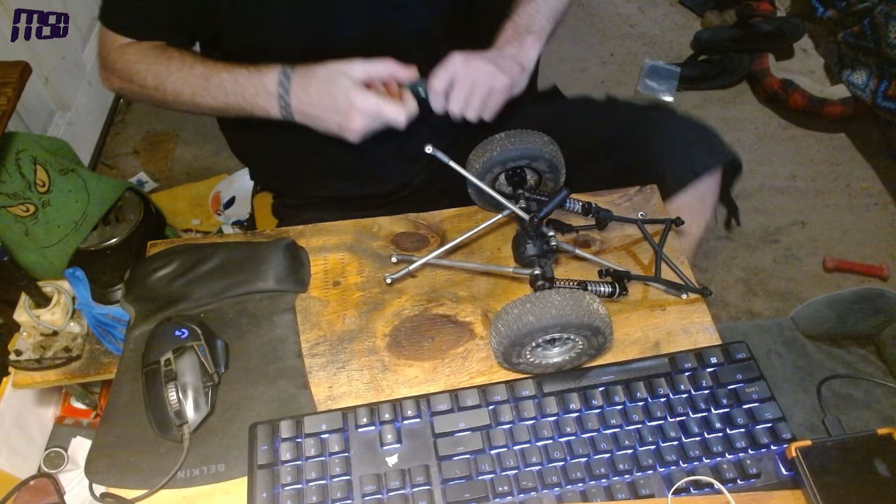Damn it, my grip doesn't want to work today. Oh man. The O-ring rolled in this thing, so I gotta use the pliers to get it out. Hate when that happens.

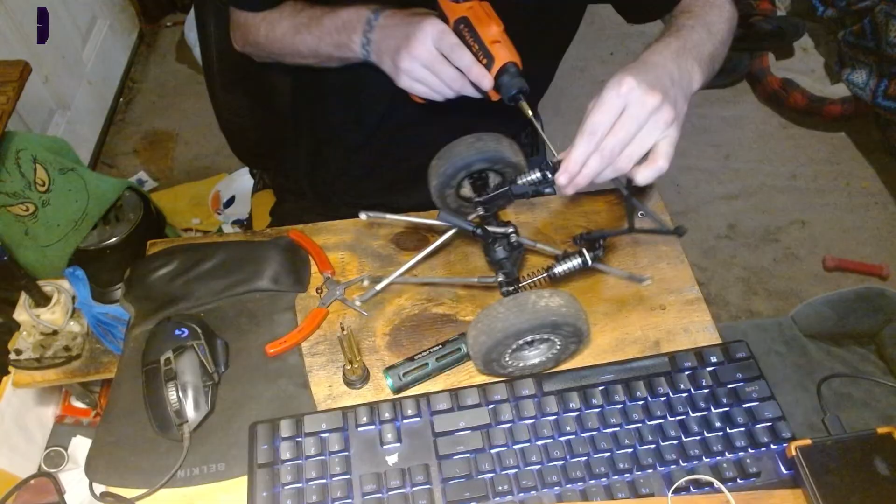Wait, that looked like it got darker. What the hell?

Where is everyone tonight? I'm a little disappointed right now.

I know I'm not talking much, trying to get everything ready for tonight.

Man, I should have put a description in that. Oh well, shit.

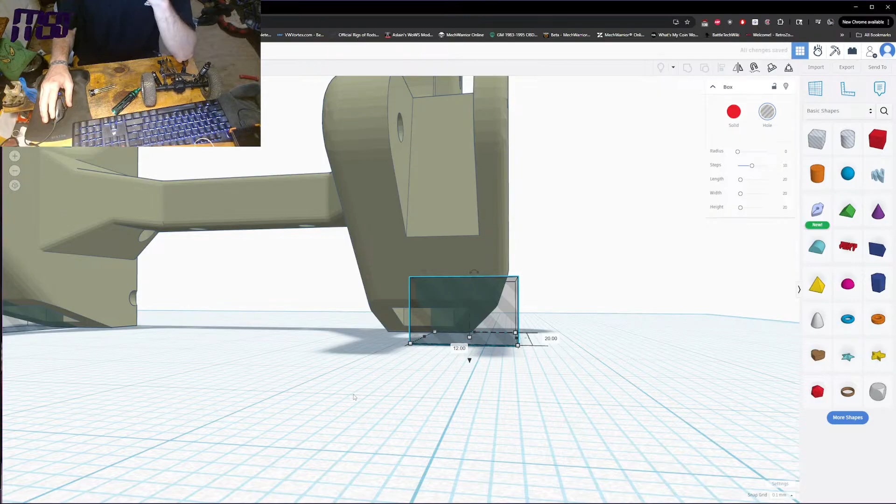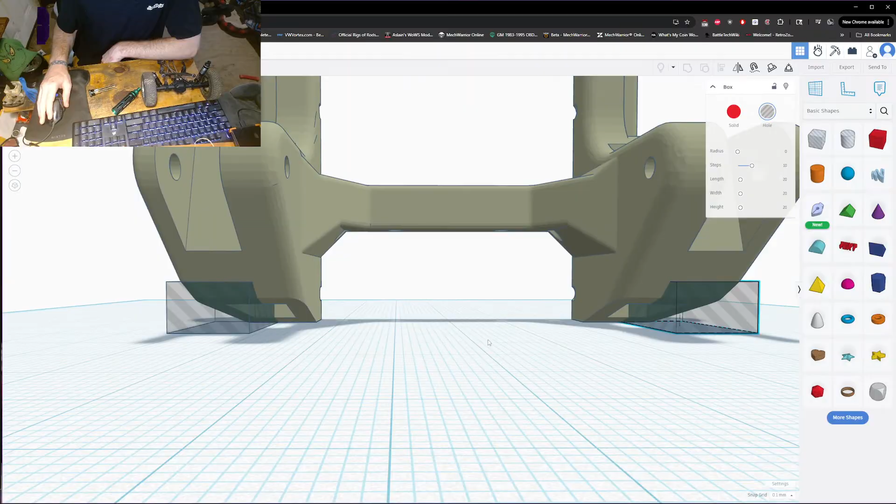Just sitting here making stuff or remixing stuff for this truck. How you doing tonight, Bill? Oh shit, there, forgot I'm working. Camera up, not need to be on the desk.

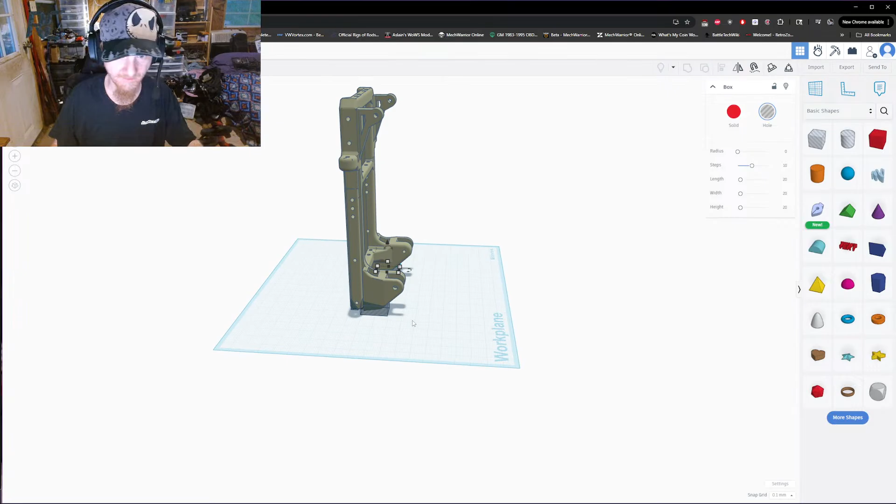Oh wait, yoink, boom. I am, I'm good. I could be a little better, but it is what it is.

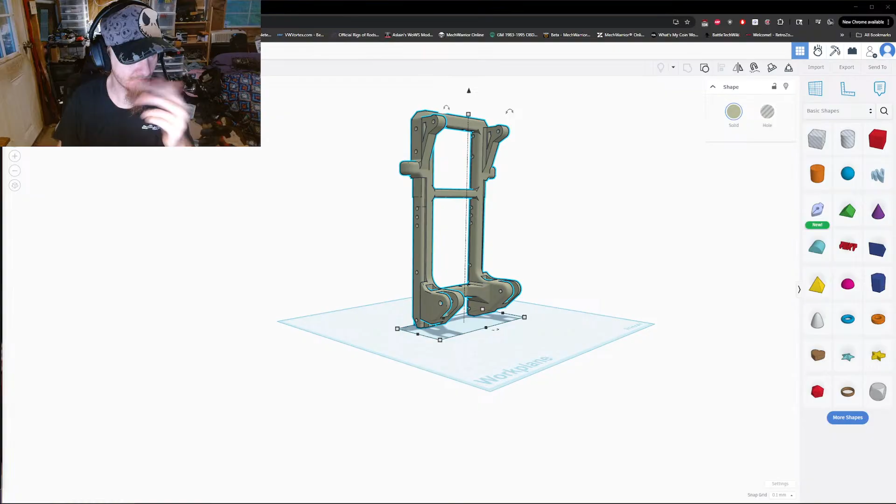Wait and see if Eric shows up. Considering the fact that I am working on his truck, this part right here that's actually on the screen right now is actually a part I'm modeling for his truck, or remixing for his truck, that is. It's like a 9-hour print, though, too.

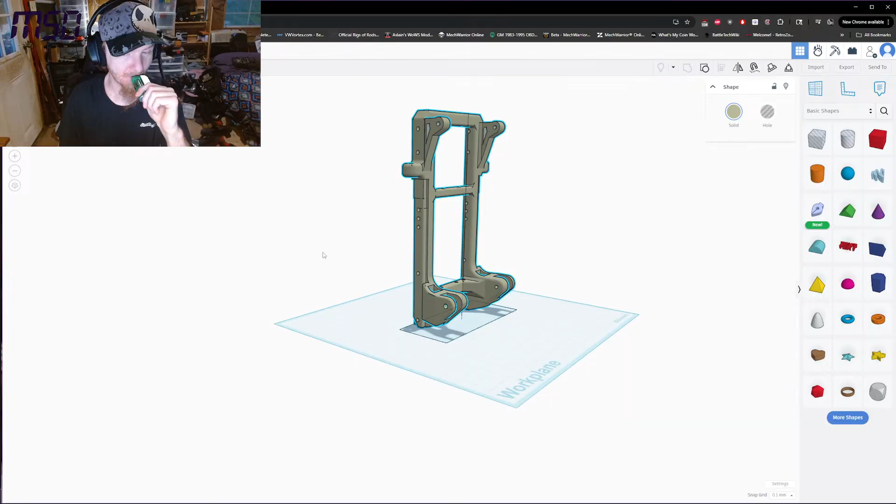Yeah, I know I was a little late on the stream. See if Eric actually shows up.

I got his body fully printed now. It's sitting off camera at the moment. All the parts are printed for it.

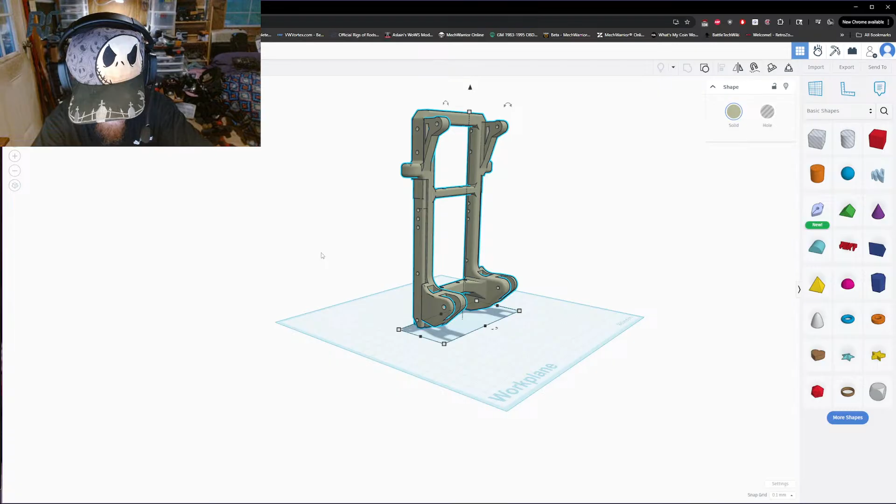Hmm, but I'm just sitting here waiting. Wait a minute. Oh no, I don't need that here.

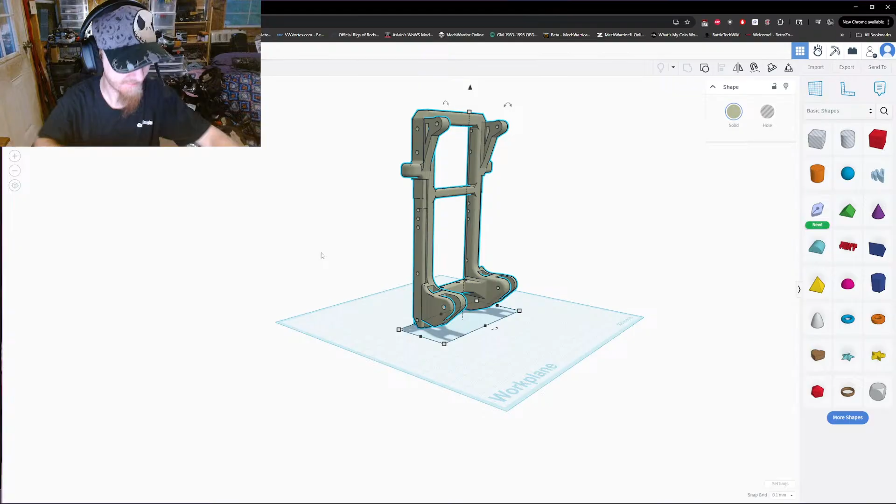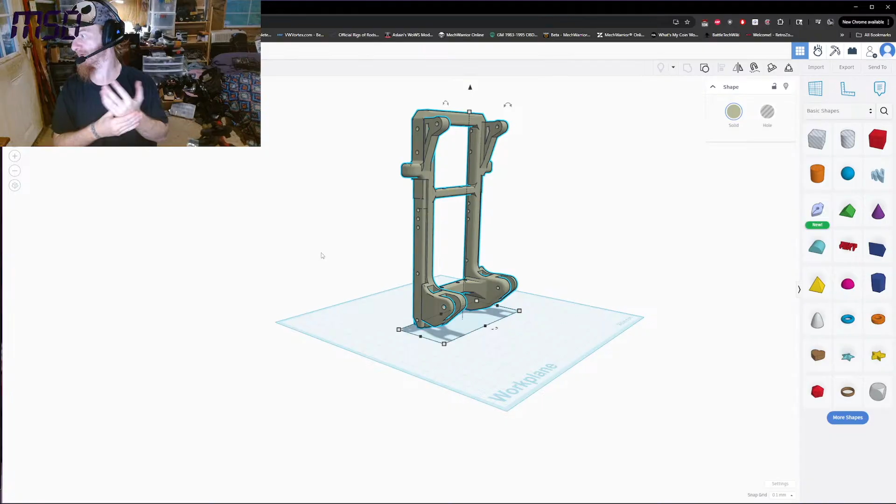There's those, okay now where? There they are, okay cool. Oh man, see who else shows up for this.

Okay, I think I've got it changed enough to where this will be okay to print. So I'm gonna go and export this.

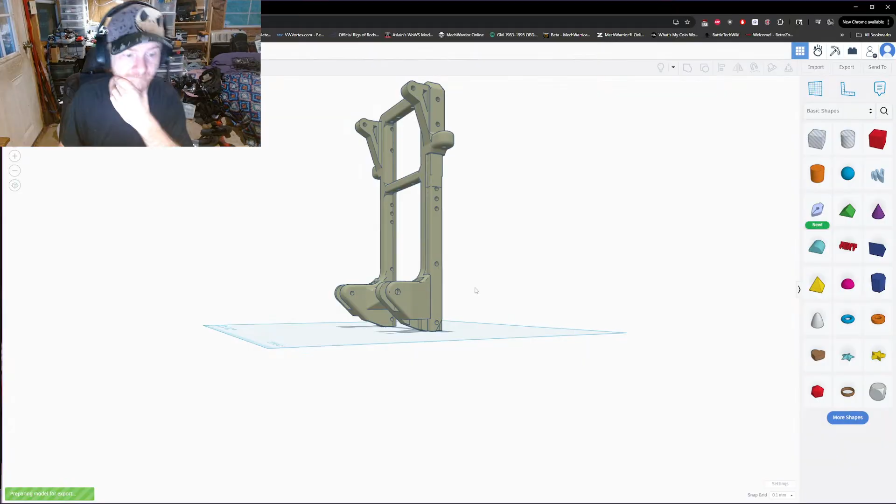Oh yeah, it's a little warm right now, so I was gonna put on the beanie, but I felt weird last week, first time not having a hat on at all. So I was a little disappointed.

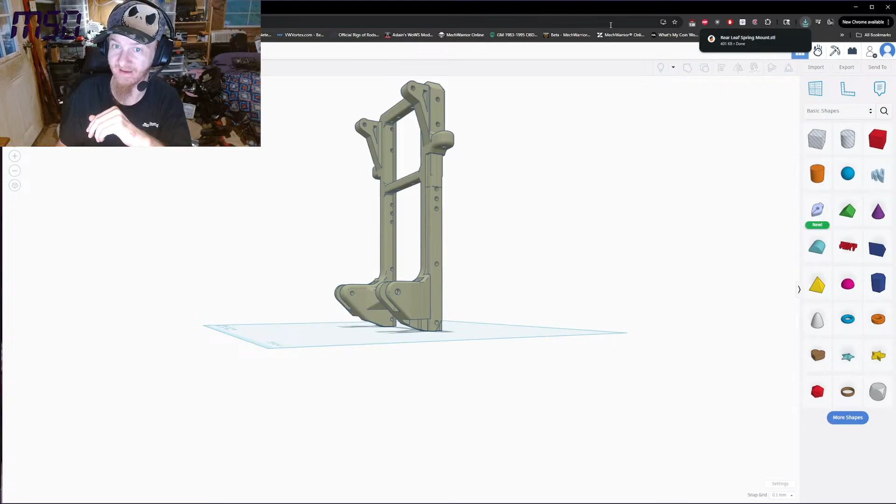But yeah, I even made some spacers too for those front wheels on that truck, because if not, I was gonna save them a little bit of money than doing the actual stuff. So let's go ahead and change that around.

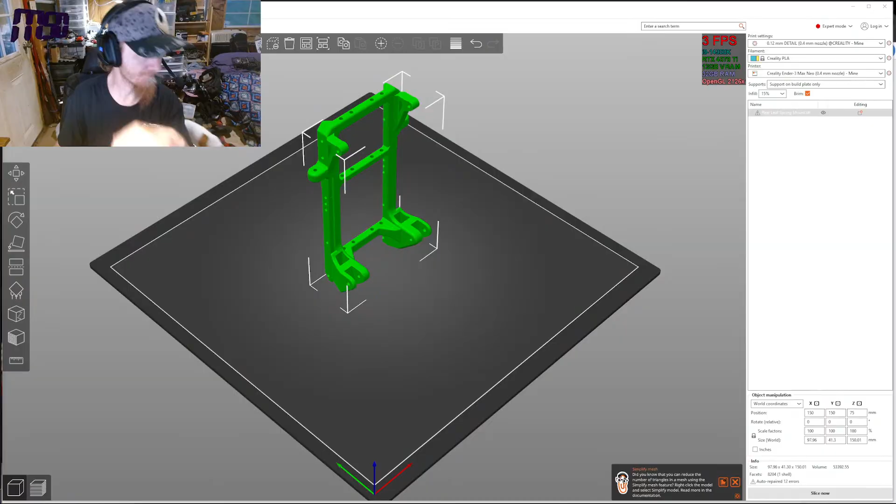Oh, actually I should have sat there and left it on the other screen. Let's see how long. Oh nope, I don't need it. That one, that one's fine.

This is 100%, no brim. Oh no, this one gets a brim. I forgot. Slice!

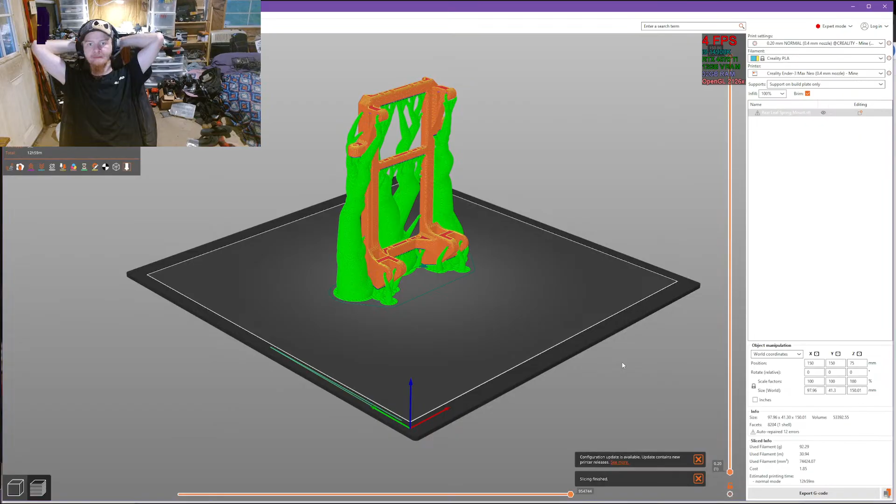Wow, almost 100 grams. Says 13 hours to print this. 13 hours to print, but I speed up my printer, so knock 3 hours off that.

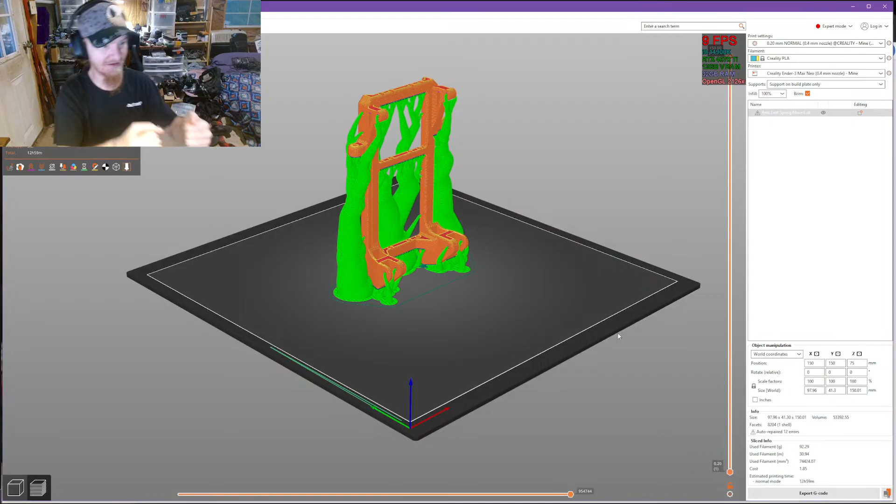Really, Bubby? I was a little done. So I was gluing the body together, and after I got all the clamps on it, got it all set, put it over the side, it's sliced now. Done. I gotta throw it on the printer.

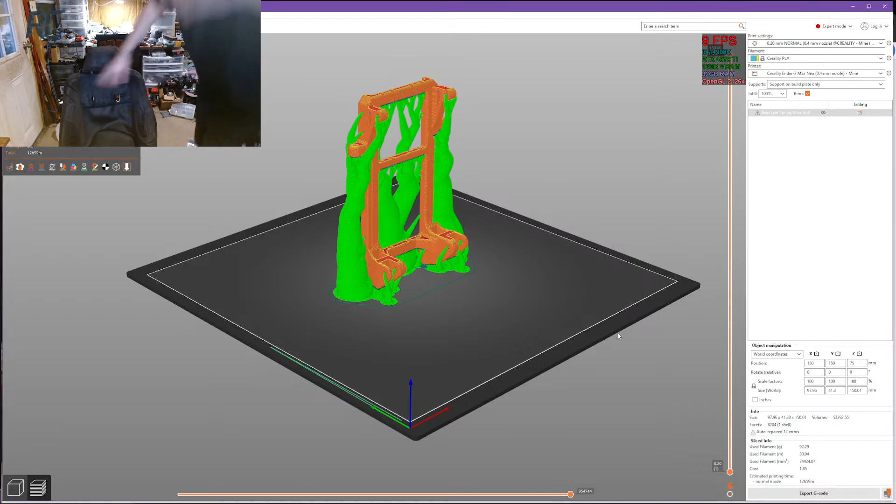Fire the printer up real quick. Put the SD card in. Ooh. Export G-code.

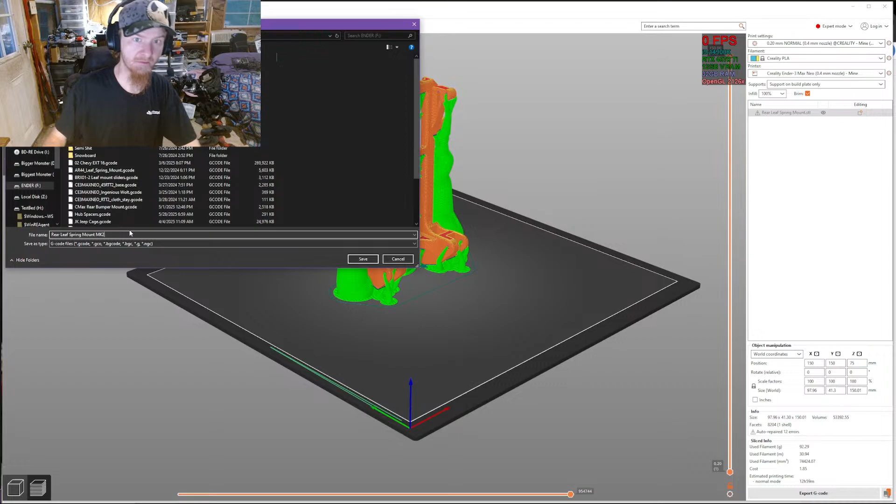That's because of how I support, how I run. So I run organic supports, or AKA trees.

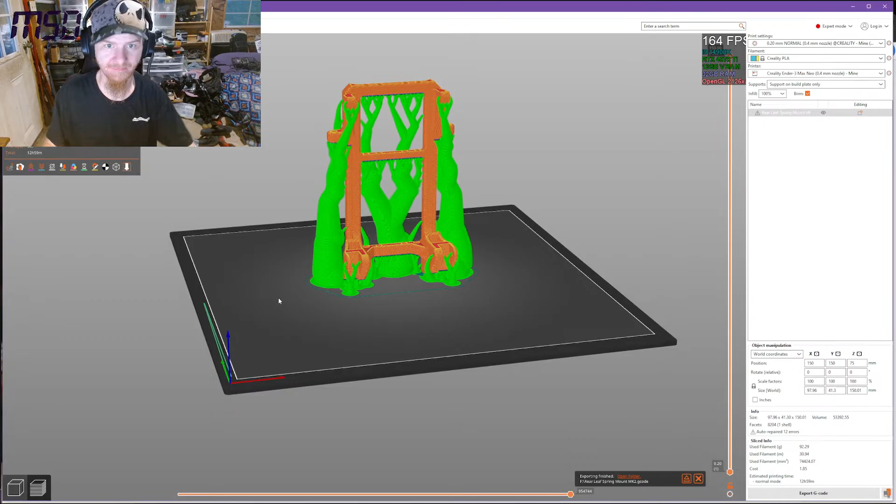Yeah, I'm gonna throw this on the printer real quick. Get this printing and have it done when I wake up in the morning.

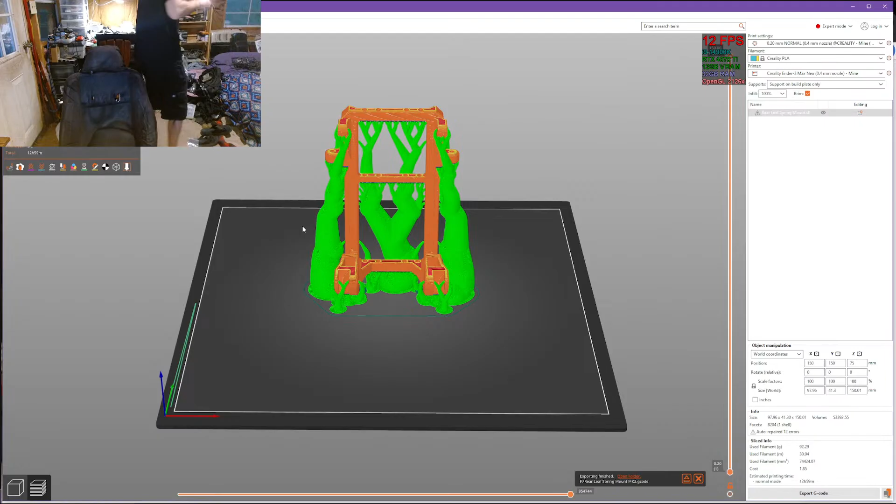There we go, got the printer started already. Give you an idea kind of what this is going to look like, Bill. You got a sneak peek here.

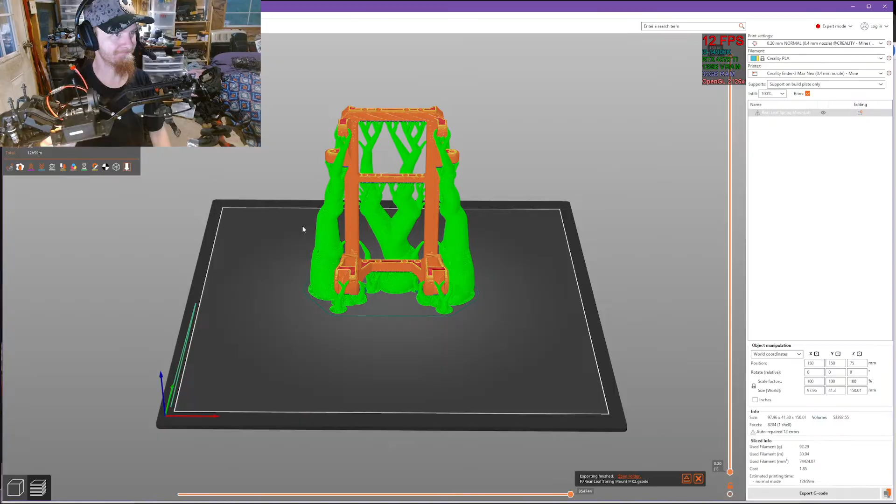So that part that I remixed is this part right here. So it'd actually be a proper Tahoe, you know, independent front suspension. Granted, not torsion bar, but hey, independent front suspension, can't complain. Leaf springs out back.

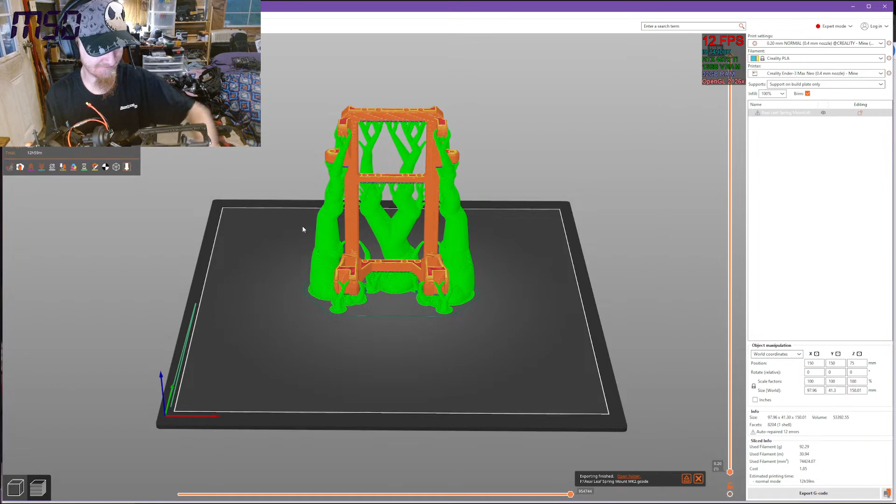Because believe it or not, so the funny thing is, this axle right here is actually the axle off this truck. Granted, I did put different links on it. I tried longer links on it to see if it would be the right length, then see if maybe I can make these work. They were about a quarter to half an inch too short.

I don't have any rod ends long enough to get that length, so I said screw this, I'm going to try something else. I have this other file I was going to use on one of my other projects, but it didn't work for how I had the back of my Taco built. So I said screw it, I'm going to sit there and make this all work.

Tried it on this, and it works, but it was a quarter of an inch too long on the wheelbase, so it put the axle too far back. Now I'm remixing it so I can slide that whole framework forward more, so it can have an adjustable wheelbase, because that whole frame slides. Then I'll drill the holes I need and tap them to make this work.

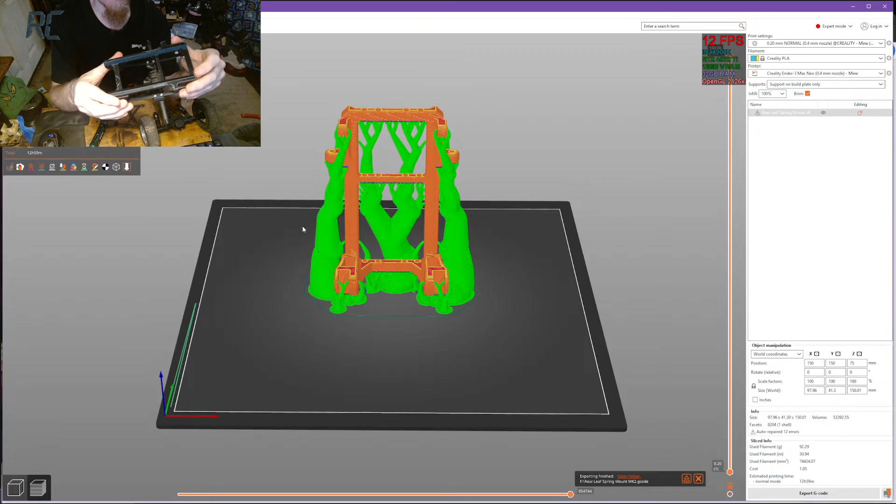When I make the final one, since this is just the prototype stage, I'll make it in PETG, so it'll actually have more strength than this one. Not a big deal.

It just kind of slots itself in between the frame rails right here, and you just run the screws in and you're golden, because that's how this works.

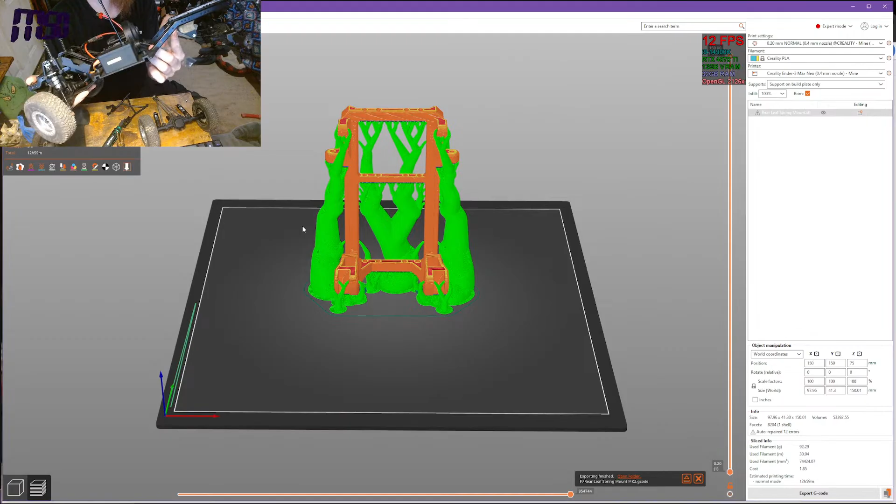It will have everything. The issue I'm running into is I can't get it any further forward because it actually hits the curve in the frame. So this whole unit right here is what I'm just building - I don't need to print the whole frame when all I need is this.

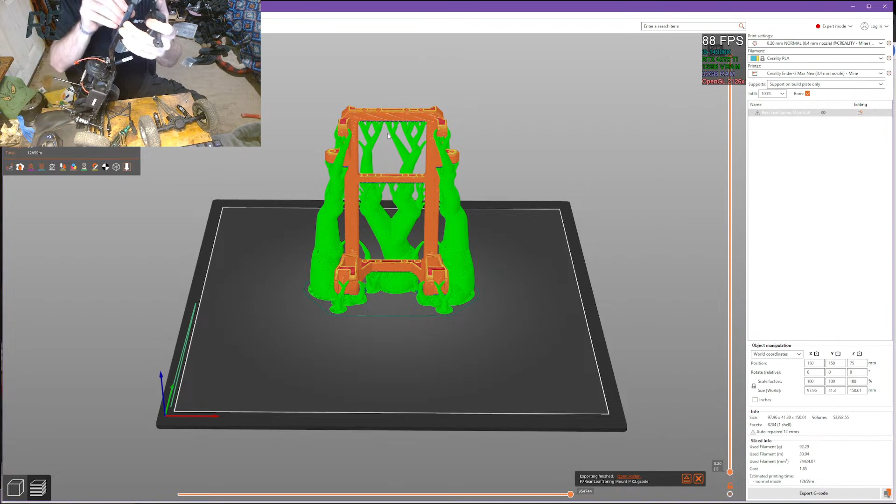See, it slips right in. This design's made for the frame - the actual C channel of the frame clamps around it, and you screw it using the existing screw holes in the frame to secure it to the frame.

But I've got to make a new drive shaft too - the drive shaft's just going to be a little too short. Luckily, I think I have enough parts laying around to make the correct drive shaft. If not, I can just order the parts - not that big of a deal.

I think it even has the - because the axle housing itself is the exact same housing as here. This is the takeoff axle housing from my Taco build. It's the same axle - I'm just using the housing as a mock-up right now to see if this is something I should do with it.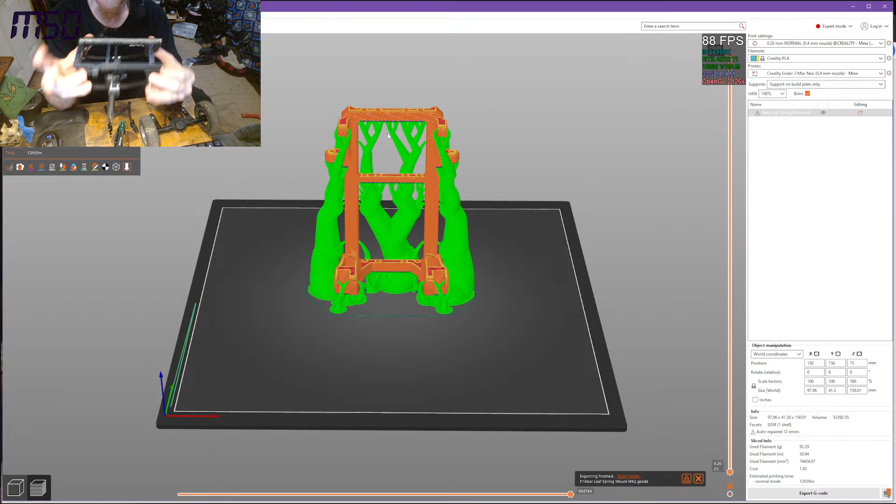Because I can always make new links, it's just a little bit of a time-consuming, tedious job to find the right length and get the wheelbase right. This right here I thought would be easy, because all I've got to do is slide, drill holes, done.

I wish it was a Dana 60, but it's not. It's just what it is.

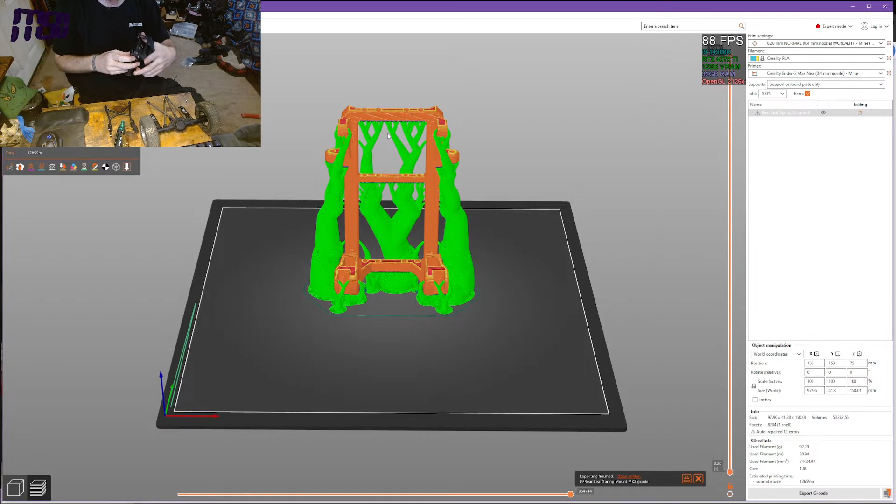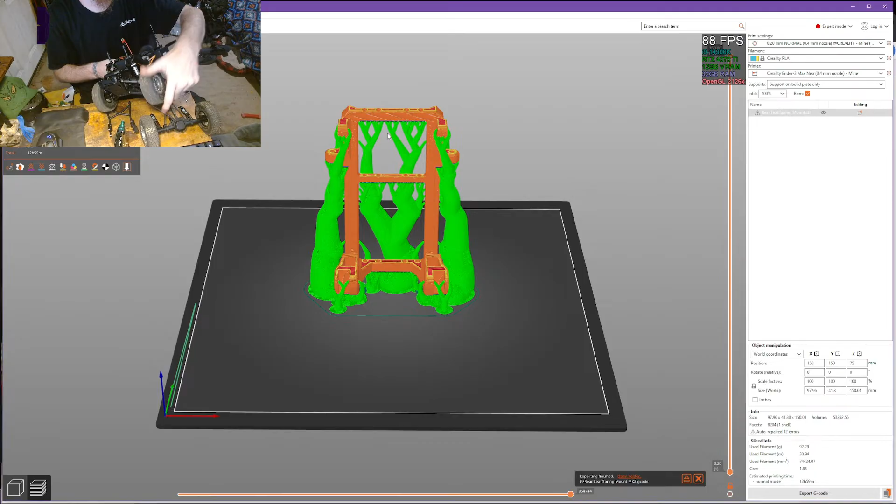But I actually printed some 0.5 millimeter spacers to put behind the wheels, 'cause that's all it needed - just half a millimeter clearance so this would still roll or spin when the tires were fully screwed on.

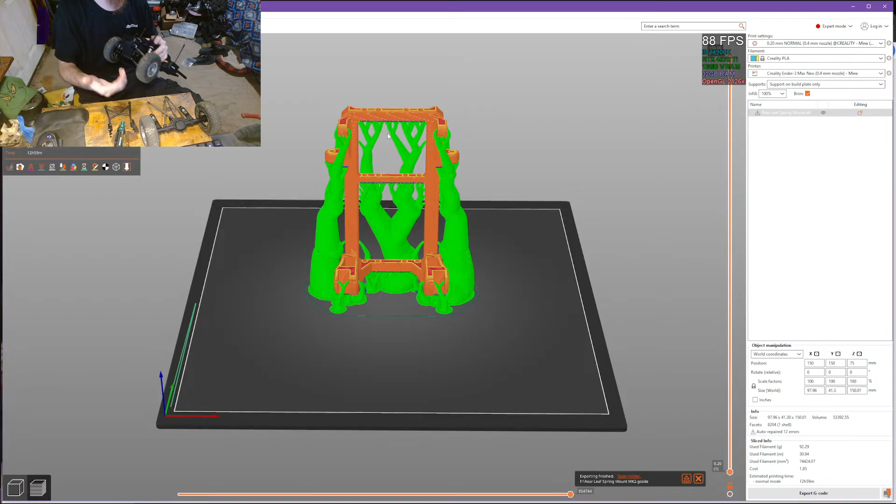If not, I'd have to order - I think I'd have to order the hubs that go in here that would space it out, which would've been almost another $30. But that would space it out 0.3, so 3 millimeters wider than stock, giving a total of 6 millimeters wider on the setup. Well, we don't need a wider setup.

I'm just going to set this like this. Move this out of my way. Move those.

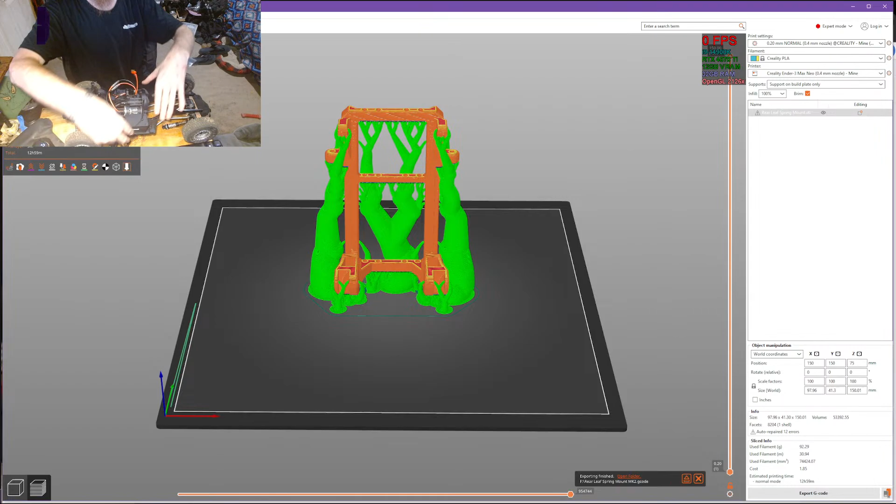Eric! Hey, buddy. Ah!

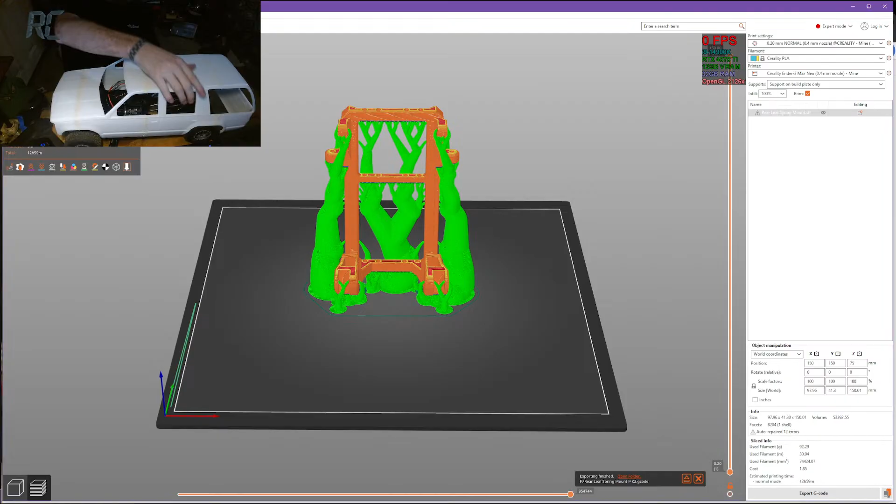So, yes, she's glued together. You're good, but I actually had a late start.

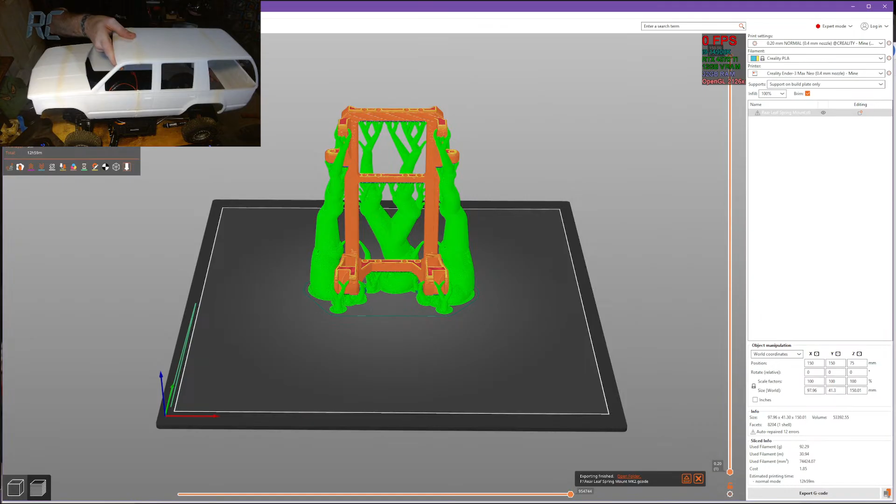Believe it or not, I didn't even start at 8:30 like I normally do, because I was sidetracked playing a different game - not a video game. But she's big, Eric. She's a big girl.

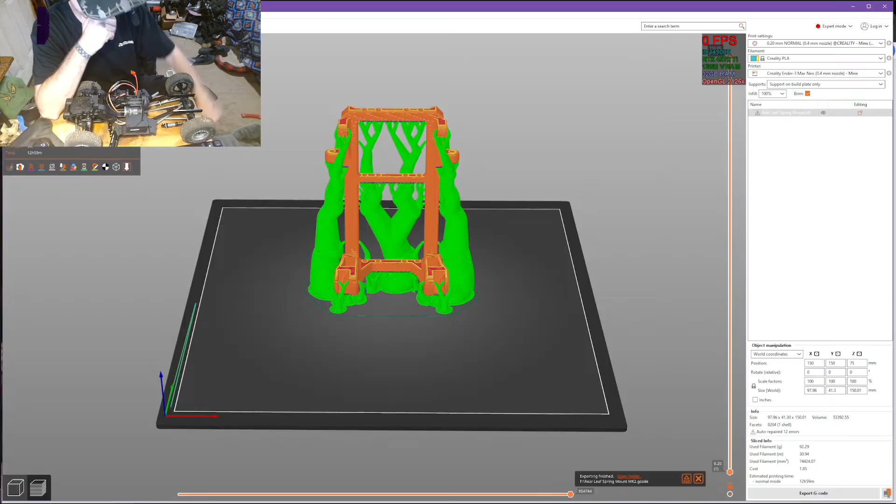But funny thing, Eric - I was messing around, and I had links, and I was like, oh sweet, I'll just take the rear links I had in the stockpile of long links and put them on the back of this thing for you, Eric. And with that body, it was a half an inch too short, or I think it was like a quarter inch.

Ooh, ow. Oh, that's right, I forgot you said you had to have that done there, Bill.

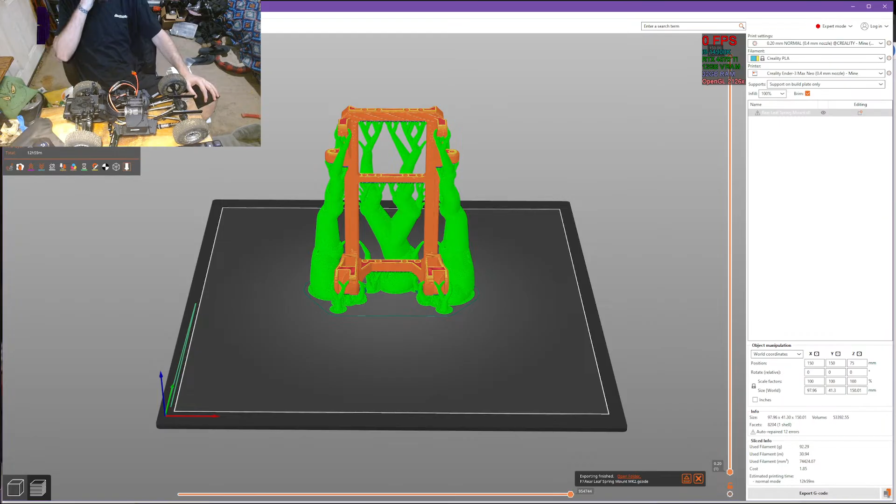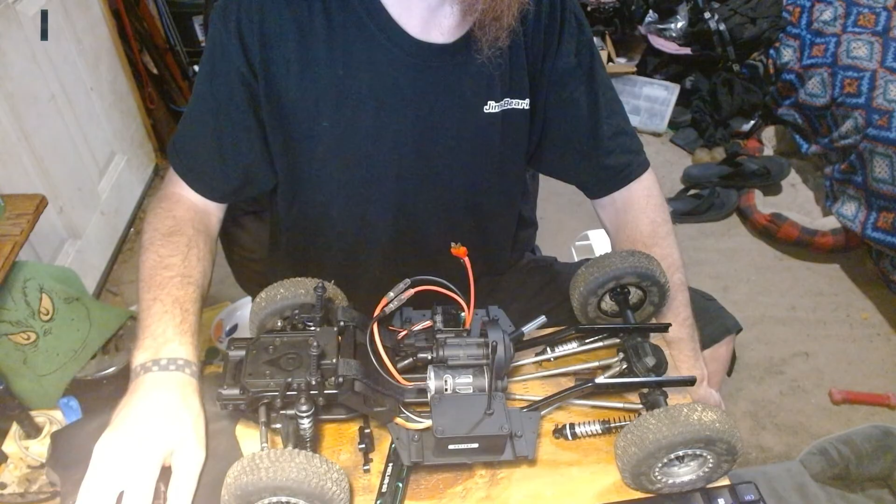So I did something a little weird there. Oh wait, we don't need this on here anymore. Let me turn the screen around because I forgot. There we go, sorry about that.

So Bill, we can do coil springs for that extra crawlability, which you're not crawling. Or put this out of the way here. You'll get a kick out of this, Eric.

Ooh, ow, Eric. Dude, I had a gallstone - that's why they removed my gallbladder. But Eric, what's this?

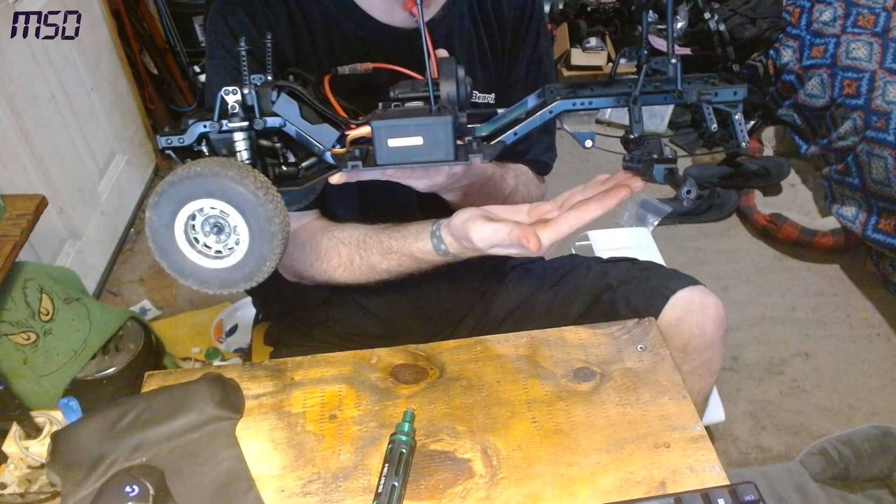Yeah, Eric, it will be scale accurate. Kind of. Leaf springs out back, independent front suspension, just like the full-size Chevy Tahoe. Granted, it's coilovers, not torsion bar, but hey.

The nice thing about this, it lets me set the wheelbase anywhere.

If you actually look, that is just a little too long. Yep, it's a little too long, the wheelbase is, I mean with that cradle.

Now I'm remaking the cradle right now. It's actually on the printer as we speak, making a new one of these, so that I can bring this a little bit closer up here.

But this is the type of work that I enjoy doing. I like problem solving, like hey, let's try this.

And I printed those up. Come on, focus, camera, focus. Hold on, let me get the camera to do its thing here. There, easy way to get it to focus - turn it off, turn it back on again.

But I was able to use a 0.5 millimeter spacer behind the wheel that actually kept it so it could still spin freely and not bind up on the hub, instead of having to spend another $30 to buy 3 millimeter offset hubs. So that was a problem solved.

Just got to remember they're in there. But yeah, problem solving, man - that's what I like to do.

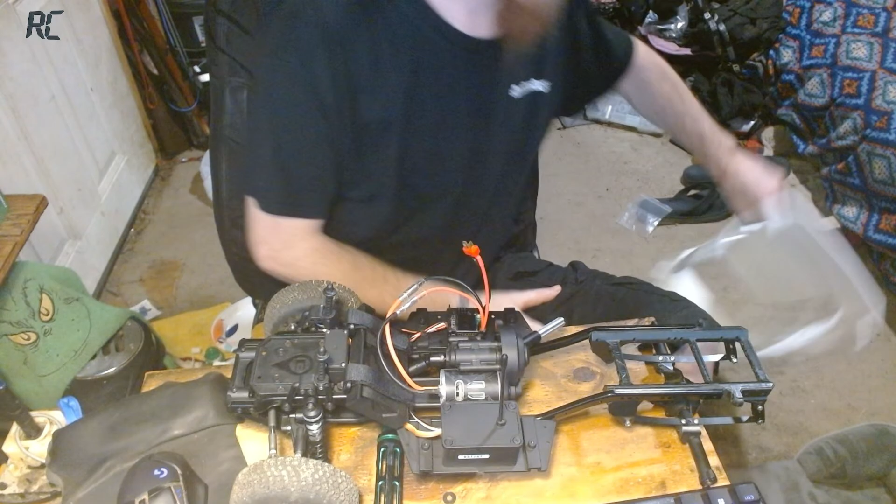And here we are. The only thing I did to this body was I scaled it for the width - for the width of this chassis, for the width of these axles. And then I'm building the chassis to fit the body instead of the other way around, where you print the body or get the chassis, measure that, and then make the body fit the chassis.

Man, I like this - this is the custom part. This is when people see you pulling this thing around, driving this thing around at the flight field, towing your planes, and people go, 'Oh man, that thing's so cool.' You can be like, 'It's a one-off.'

But I hope I inspire other people to build like this. There's lots of cool resources out there to find parts. We've got 3D printers out, they're cheap - you can get decent printers for cheap now too. So you start with a cheap chassis or a cheap kit, RTR, and then you go from there.

Not like I'm saying this is a cheap chassis - this is actually still a very good chassis for what it is. I enjoy this chassis, I like the advent of it.

Now I do have to make a change - I do have to lower these body mounts.

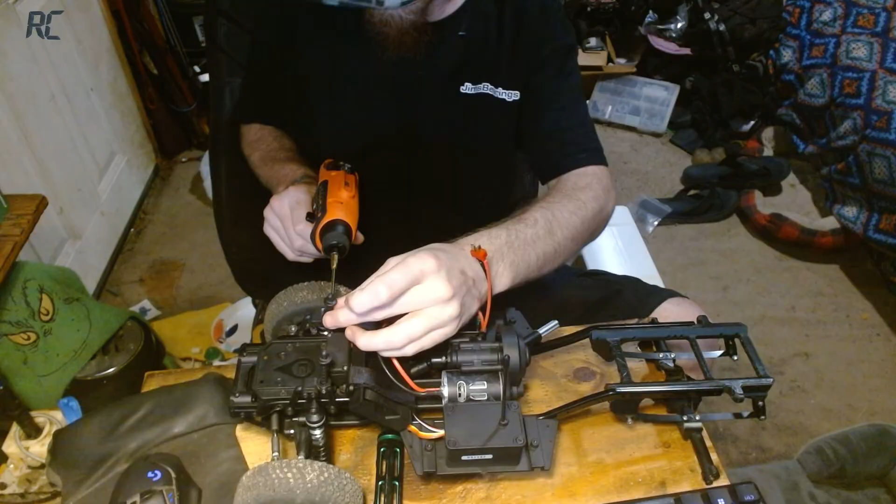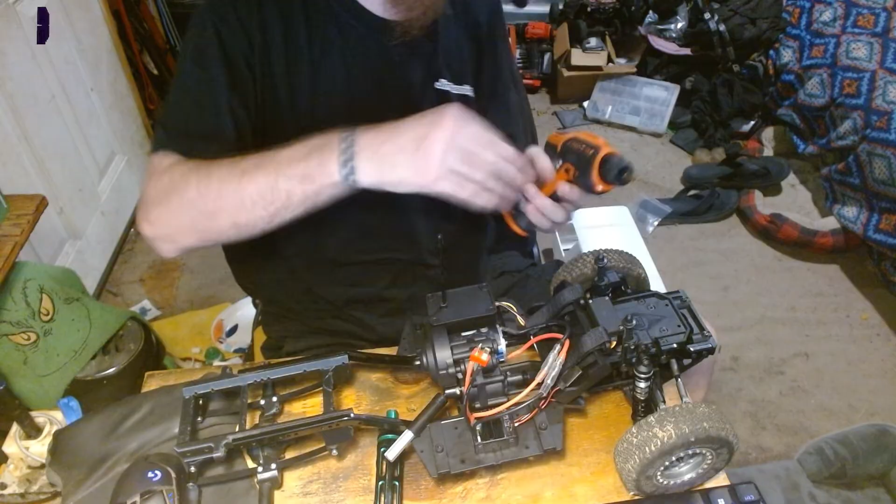I'll try that. Trying to find the correct height to have the body sitting at, and because I still have the body post...

Oh, that's 3, I need 4.

And we'll put this back on. Granted, I want to spin that around that way. There we go, yeah, I even had the clamp - I even printed off the clamp-on shock mounts too there, Eric, so it'll still have shocks.

Doggy cam. Hey Telly, what are you doing? Internet famous.

Ooh, I kind of like the way that's sitting now. So if I put the weight on it, might lower it down a little bit more. But I gotta raise the back - looks like the back is actually sitting a little lower than the front, as in the side.

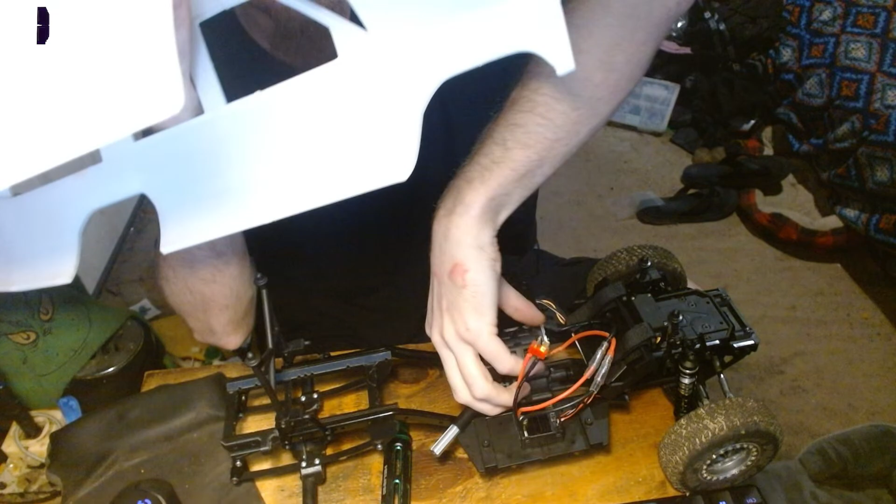Not too bad. But I did actually discover something there, Eric, with this model. Put the chassis down because I need the body now. Put that over there.

So, the rear bumper, Eric. To actually start, my OCD is driving the best, is getting the best of me right now with this rear bumper.

Because if I use the mounting locations that this bumper is supposed to sit at, which is right here like this, okay, look at how much of the body is still below it. So I gotta trim all this off, because that's gonna drive my OCD nuts seeing that much of a lower valance on this body.

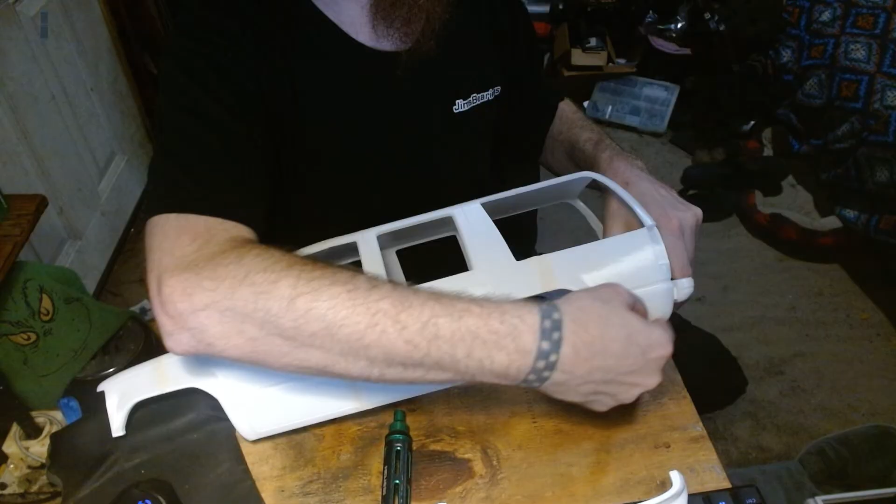And then re-angle this and re-radius this part here to match. The only flaw I have found in this body so far is just that little mess up right there.

Oh no, Eric, you're probably gonna get people going, man, I'll buy that off you, how much you want for it? Like one of my other truck projects I had, the TF2 — oh yeah, my TF2 that I did my step side body on. People were asking me how much I wanted for that truck when I beat the creek this year. I kind of told them I wasn't gonna sell it, and that it wasn't for sale.

But man, this white is white. I can't wait till I get this thing black. But... ah, oh no! Boop.

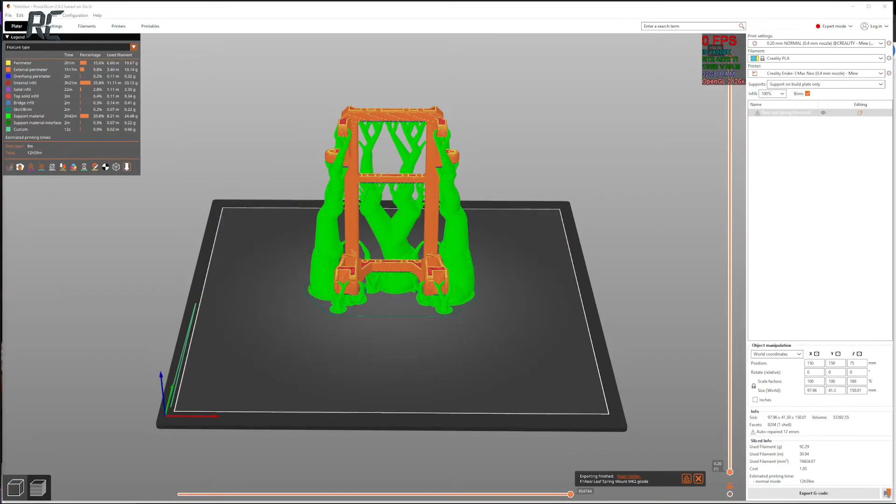Yeah, I don't want to glue this on. Like I don't want to put this on until I figure out what kind of lighting.

There, forgot to deburr it. But not too bad. And I think the scale — I think it being an 8 scale really does actually work for this thing better than trying to make it 10 scale.

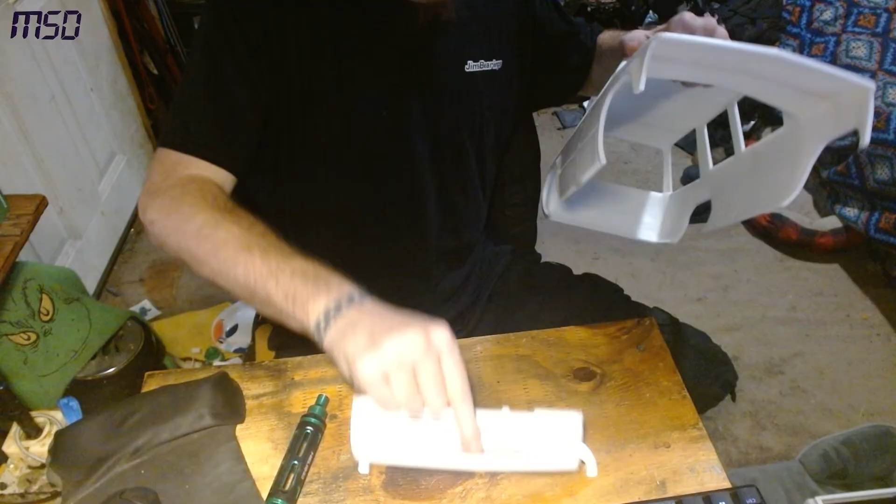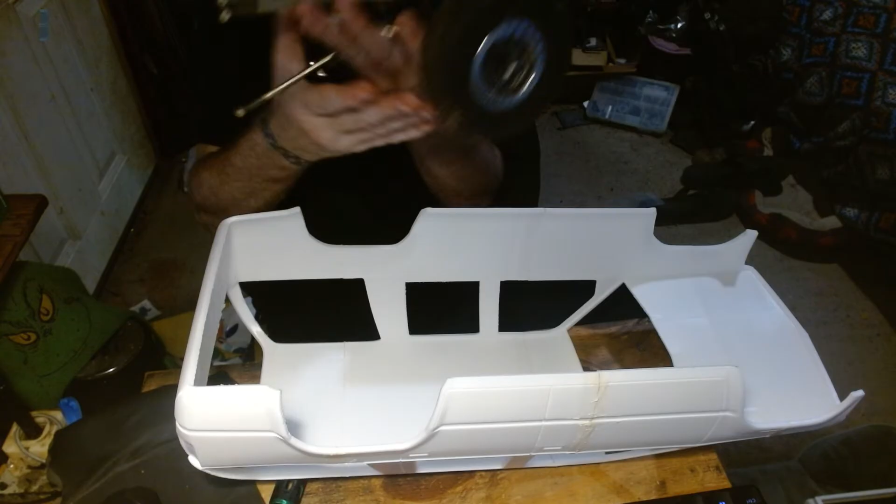Because it literally — so the front wheels stick out, I'm not gonna lie, the front wheels do stick out of this body a little bit, and that's because the front is narrower. It's a little bit narrower here than it is back here, because here's the rear axle, and I literally can stick it, and the tires just touch the inside lip, just the inside lip of the thing. It just sits there. And then the front, though, the fronts really sit on there.

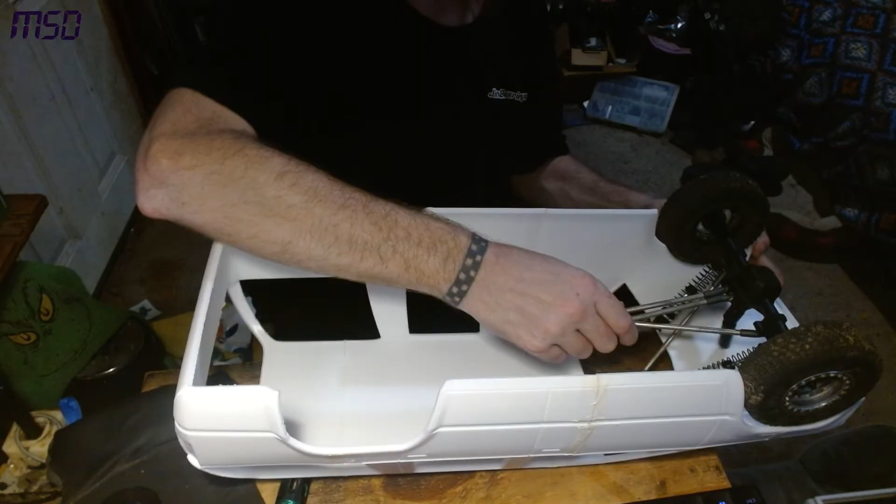But the front is wider than the rear. Like on the chassis itself, the front suspension is actually wider than this axle is. So that does make it a little bit wider in the front. But I think we'll see how everything goes when I get the rest of the stuff done.

Yeah. And then I have to order more of these, because I don't have enough of these for this. But these are the magnets I use.

But, so each one of these magnets right here is 12 pounds by itself. When you put them together, well, it still takes over 12 pounds to take them apart. Like since they're now touched together, it's a real pain in the ass to get these back off.

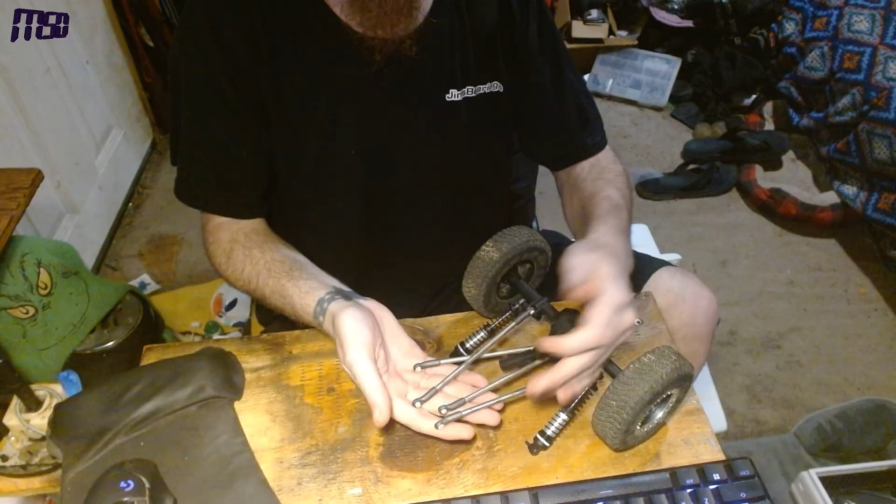I do have more leaf spring mounts coming because, like I said, these are just mock-up to give you a visual representation of a leaf spring rear suspension on the truck. If that's something you like, say 'hey, that actually looks pretty good,' go ahead and do it, or take the extra time and make the links, because I have to make a new set of these since these are off my Tacoma, my Night Runner Taco build. They're way longer than the stock ones. Let me see, do I have them here? Did I put them in the box?

So here are the links that I took off your truck. You can see - that's a bottom link next to a bottom link. So they are longer, I did put longer links on it.

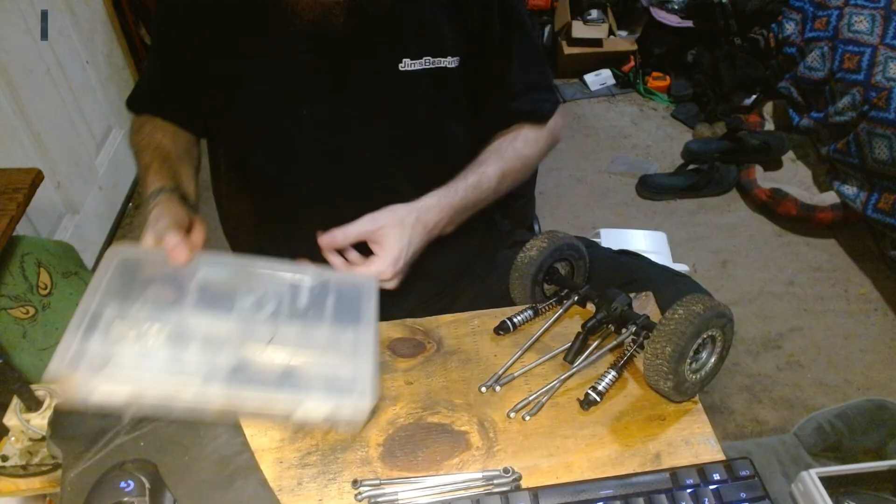All right Eric, like I said, you got it man, you're getting all this nice stuff. And here are even more links - oh look, oh a steering rod, cool, I needed one of those. Three-link bar stuff, it's great.

Oh I forgot, I have other bumper mounts, those are sway bars, shock towers. I got all kinds of stuff in here. This is nothing but my Element box - all these parts in here are off the Element trucks, and it's all interchangeable with Axial stuff too, Axial Racing, or Axial Adventures now, sorry, they're rebranded - Horizon Hobbies, either way you look at it.

Then if you want leaf springs, I'll disassemble this stuff and transfer the leaf mounts. Now Eric, the other question is this: since you're going to go leaf mount, how stiff of a suspension do you want on the back?

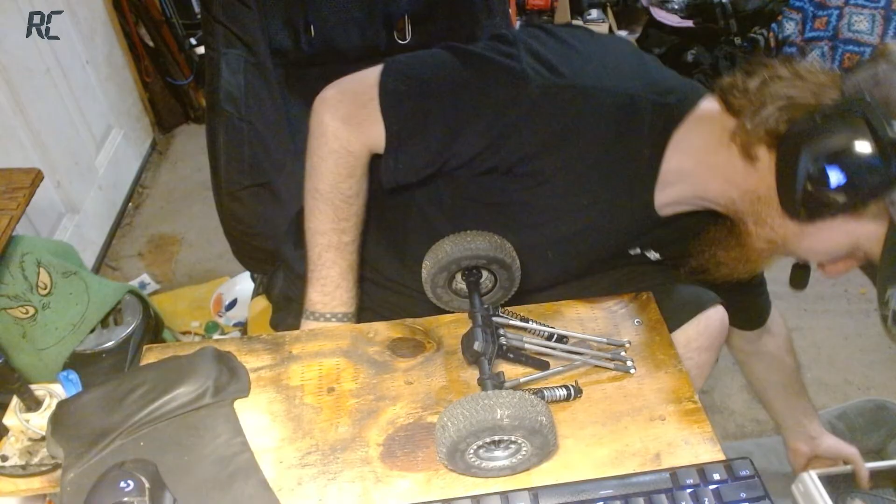And I have different length ones as well, so different than just these. For the K20 build that this was going to get, it was actually going to get some really stiff rear leaves because I wanted this to be my tow rig, so I can tow trailers behind it and also be able to put stuff in the bed, like all the batteries or whatever.

I'm just messing around, but let's put this away and see how good of a glue job I did and see how much of a gap I'm going to have. Jeez, I gotta stop hitting that button on the keyboard - keep hitting the Windows button.

Yeah, what I'll end up doing as well, Eric, is I'll see what I can design up for an anti-wrap bar, so it'll have an anti-wrap bar. I don't know how much weight it'll handle, and to be honest I'm gonna have to do some testing with this printed stuff. I will have to paint it though, I know that much.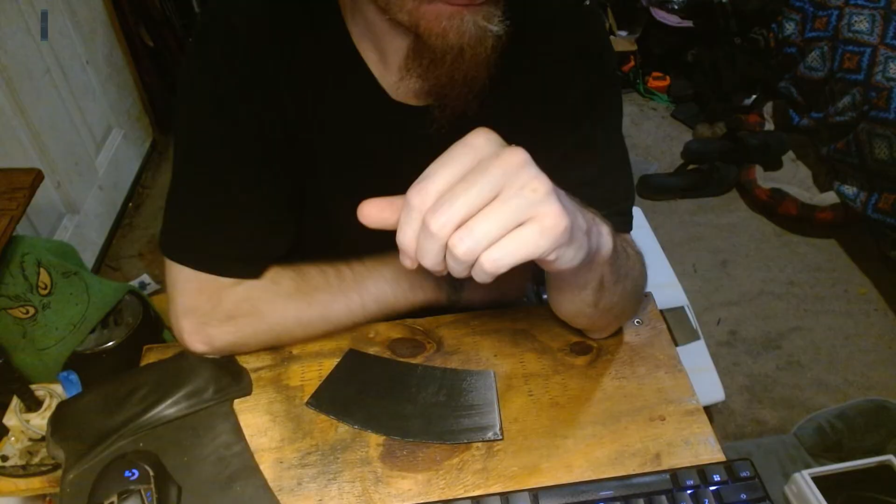All right, you actually let me know, Eric, if you have the paint code for the paint job on your truck, and you can email it to me. The paint code, because I can get it exact, match it paint code for paint code, and then put some of that red pearl in it.

And I'll be honest, I still haven't decided if I'm going to put the twin hammers back together or not. That's why it's still sitting out. I keep putting it on the workbench and then looking at it, going, I need to put electronics on this thing. And then I just don't bother putting electronics in it. I'm like, eh.

Oh, now that I got a couple layers on this print, I can actually speed this printer back up. I'm still waiting for my new printer to show up. When I get the new printer, I'll get it going.

Okay, it's just GM Black. All right, got it.

Yeah, I'm gonna actually get the paint code for my truck. But I know when I do the 69 here, when I go to paint this body, I will actually be getting it painted in Chevy engine red.